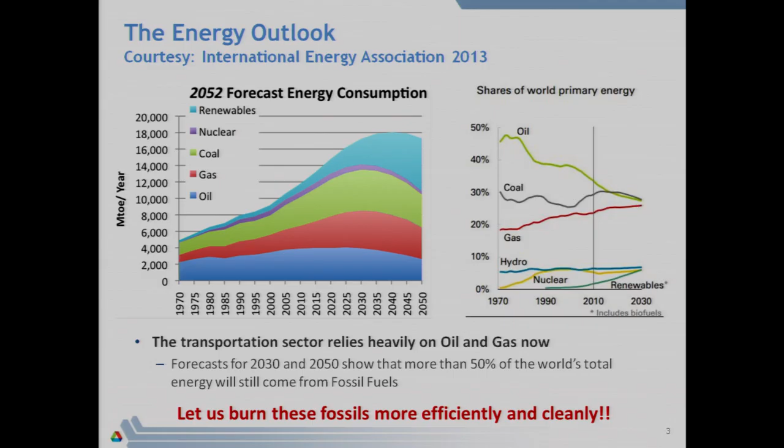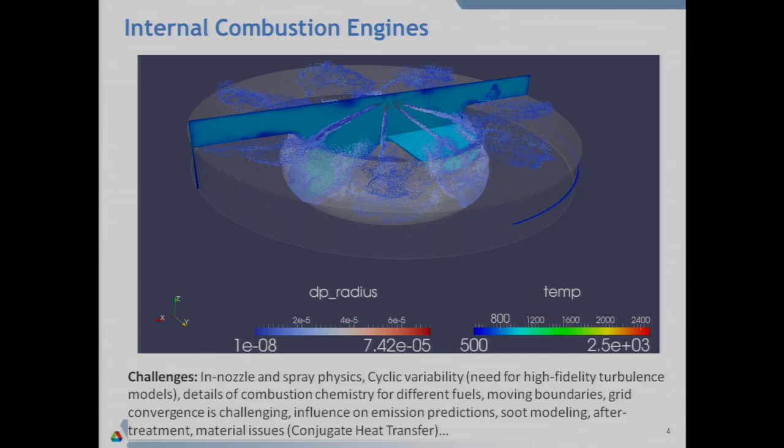What you're looking at here is fuel being injected at the top through a 7-hole injector. As the fuel comes out, it breaks up into smaller droplets, then evaporates. Then ignition happens, combustion happens, and that results in the power stroke that drives your vehicle.

This process is actually very challenging. It looks simple in an animation, but it's challenging because the nozzle diameter is 100 microns—really small, about the diameter of your hair. The engine runs at 1500 to 1600 RPM, revolutions per minute. So you can appreciate the length scale and time scale we need to resolve to do this problem correctly. Those are some of the challenges I've listed here.

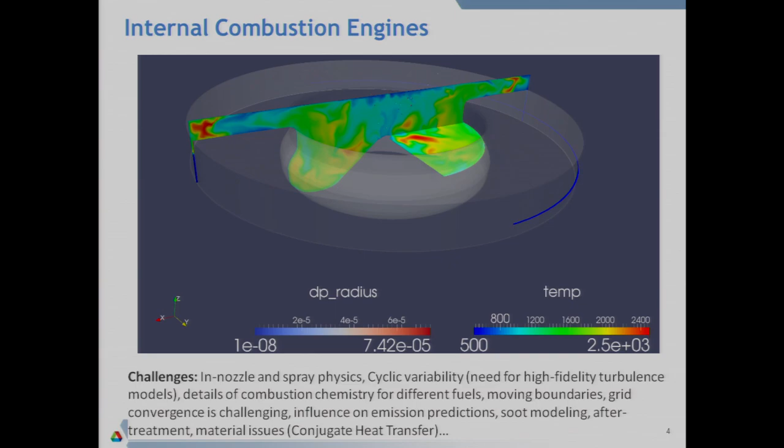The problem with this case is that there is also two-phase flow physics. Anything complicated you can imagine, an engine will have it. This has two-phase flows; we need to resolve the flow inside the nozzle where cavitation occurs. No two cycles of an engine are the same.

You can kind of feel it when you're driving—if you're on the highway with cruise control set to 65, I can assure you no two cycles of your engine are the same. So how do we account for that in our simulations? Like I said earlier, combustion chemistry and fuels are changing too.

The fuels that we burn in North America are very different from the fuel we burn in Asia. The fuel we burn in Illinois is different from the fuel we burn in Texas. So how do we account for those in our simulations?

Of course, we have moving boundaries. Spatial convergence, grid convergence is a big challenge. And then getting the emissions right and soot modeling right is very difficult because you have to get all the processes upstream correct to actually predict the NOx and soot.

And then the new things we are getting into is conjugate heat transfer. For example, for the longest time we were doing simulations of diesel engine, spark ignition engine, and we understood what temperatures to expect, what the peak temperatures are, and we would design our materials based on this. But now we are moving into this area where we are doing low temperature combustion.

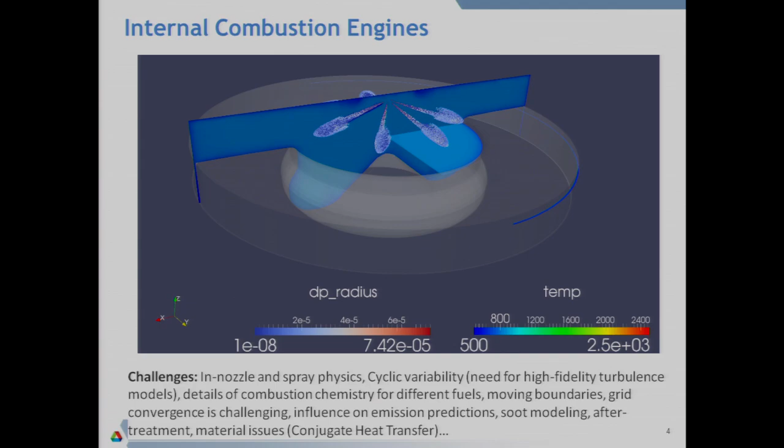So we are trying to intentionally keep the combustion temperatures low. Obviously the material requirements are not going to be that stringent. So how do we couple our understanding of the combustion and the fuels and what's happening near the boundaries to designing the materials? These are all the challenging issues we are facing.

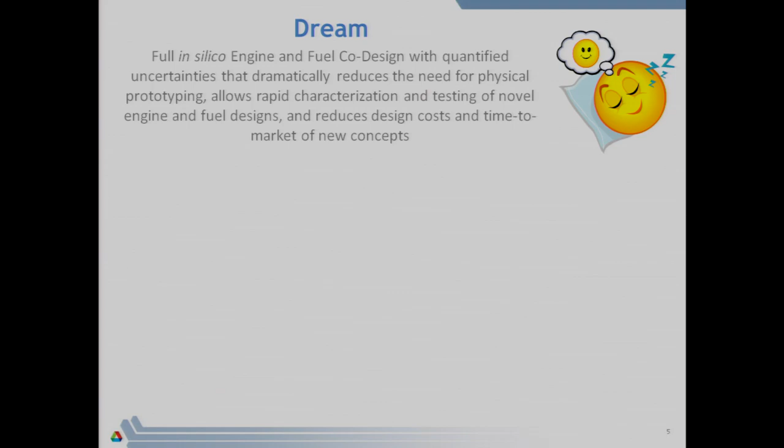The dream, of course, is to design an engine based on simulations, and that's a dream. I don't think anyone has realized it, but the true challenge is if you can actually design an engine faster than experiments. All experimentalists would tell you they can design their engine pretty efficiently because they have been doing that for the last 50 years.

Simulations only form a part of it. They only provide some insights, but engines have not been designed based on simulations. So that basically brings us to the reality. The reality is that engine simulations are quite simple, and I have a couple of slides talking about why they are simple, why the industry wants simple calculations.

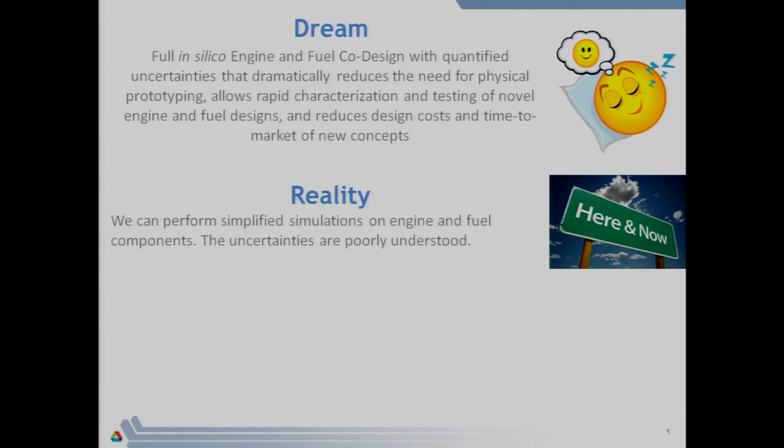The main reason is because our uncertainties are poorly understood. So we basically need some sort of a transformation function, which is the goal of my team: to develop predictive computational capabilities, aided by high-performance computing.

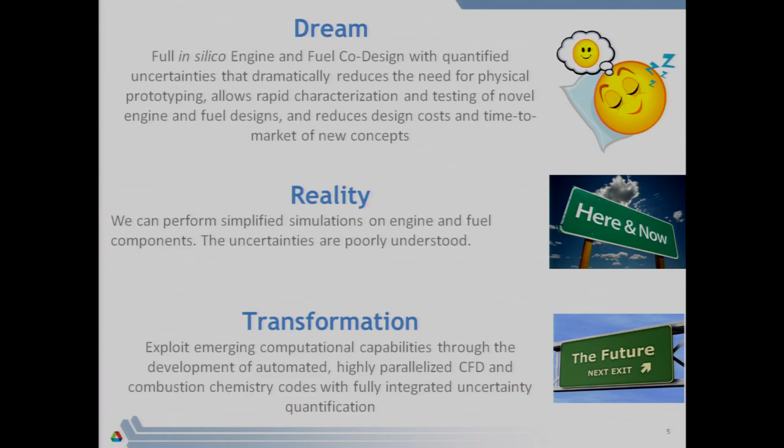For example, in industry, when they do simulations, they do sector simulations. They do not do the full 360, and of course they miss some physics. So if you want to do the full 360, that's a factor of 10 that's required.

Like I said earlier, no two cycles of an engine are the same. So if we simulate just a single cycle, of course we are missing physics. That's at least a factor of 10.

More complicated models - industry tends to use what we call RANS, average, time-averaged models, and of course they do not work very well. So if you want to use some sort of LES model, that's a factor of 10.

If you want to resolve the two-phase flow physics, that's easily a factor of 10. And then if you want to really understand the chemistry - in general, when we represent a fuel, we tend to represent it using one or two components. That's very simplified. A real fuel consists of maybe 1,000 components. So if you want to add that complexity, that's easily a factor of 50.

And we wrap uncertainty quantification on top of it, this becomes a really expensive problem. So the industry wants to solve this problem within 24 hours. They want to press the button tonight. When they come back tomorrow, on 64 processors, they want some sort of a solution - whether it's right or not, that's the solution they want.

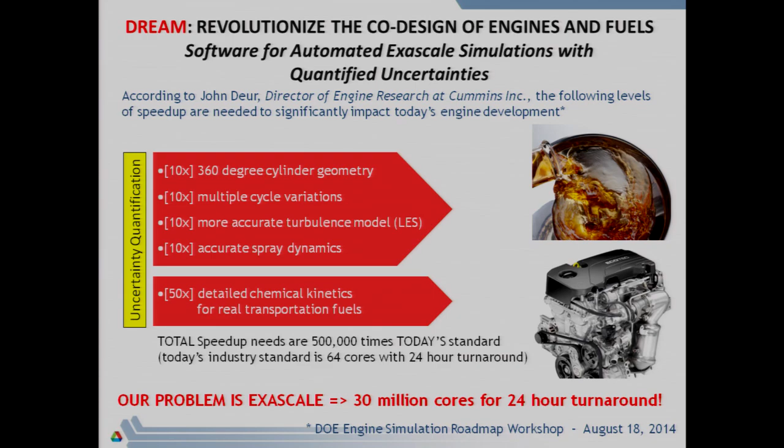So for us, what we are trying to do is if we multiply these speedups, and all these are multiplicative, this actually is an exascale problem. It's easily an exascale problem without any stretch of imagination.

So I think we are pioneering some of this work in trying to scale our engine simulations on supercomputers like Mira, and I'll show you some of our results.

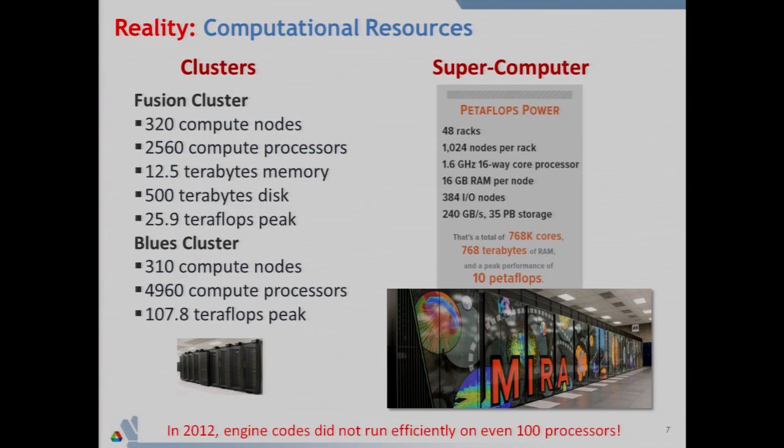The reality is none of the existing resources are exascale. The harsher reality is our engine codes don't even scale on 100 processors, so I have no reason to complain. This is what we are trying to do.

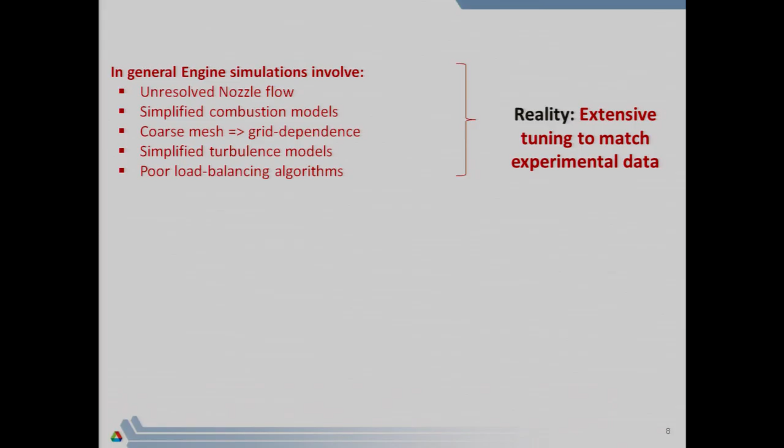In general, engine simulations in industry, academia, and maybe 4 or 5 years back in national labs, were highly tuned. We wouldn't resolve the flow inside the nozzle, and we'd use simplified models for spray and combustion. Load balancing wasn't an issue because we were running on 8 or maybe 64 processors.

The strength of this approach was that when we matched experimental data after tuning, the CFD could provide a lot of insights, and in the domain where it was validated, CFD was very helpful. Industry does that all the time—they get experimental data, validate their CFD model, and go from there.

Now our approach, which we call a transformational approach, is this: we are going to use detailed chemistry-based combustion models, and finer and finer meshes, pushing towards grid convergence.

When I started my postdoc at Argonne, I was surprised to find there was no grid-convergent engine simulation done before my time. That was quite shocking for me. We've been able to do a few, and I'll show you some. Then we'll talk about implementing better turbulence models, like the dynamic structure LES model.

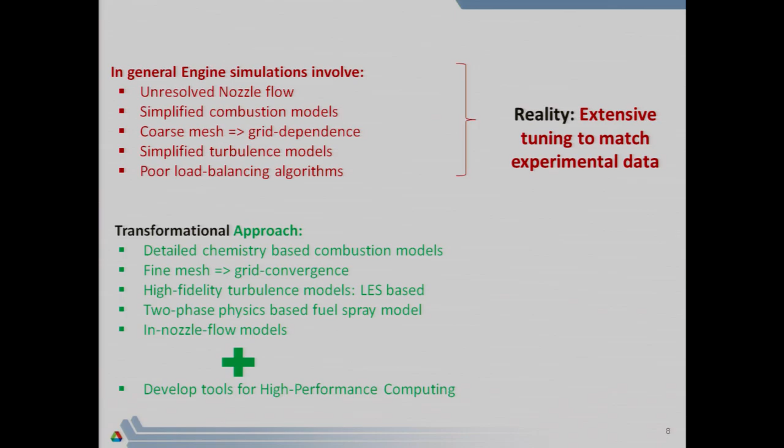We need a better two-phase flow model—this is basically my background, doing two-phase flow simulation. I'll focus a bit more on these areas, looking at cavitation and things like that, and of course working with LES to make these simulations highly parallel, so we can move towards predictive engine simulations. Keep in mind, we are not there yet, and that's job security for me for the next 20, 30 years—maybe job security for Janardhan too.

All right, so let's get to the meat of the talk. We actually use a commercial code called Converge. It's used a lot by industry, so we tend to use it.

All our collaborative partners—Cummins, Caterpillar, GM, Chrysler, Ford—actually want us to use this code, because whatever model developments we do in it, they can get directly. If we develop something in OpenFOAM or Kiva, it's an additional step for them to implement in their workflow.

The reason it works for us is because we have almost full source code access—about 80 to 85% of the code. The 10 to 15% we don't see is basically their meshing algorithms, which are their family jewels; they don't want to share that with us, and we're okay with that. Even with the 80 to 85% we have, we're able to do a lot of things, and I'll talk about it.

We have actually done some of the largest engine simulations known. Some of the numbers are shown here—I won't go into detail, but the key thing is we've now shown good scalability on 4,000 processors. If you remember my earlier slide, in 2012 we were at 100 processors, so you can see the improvement we've made.

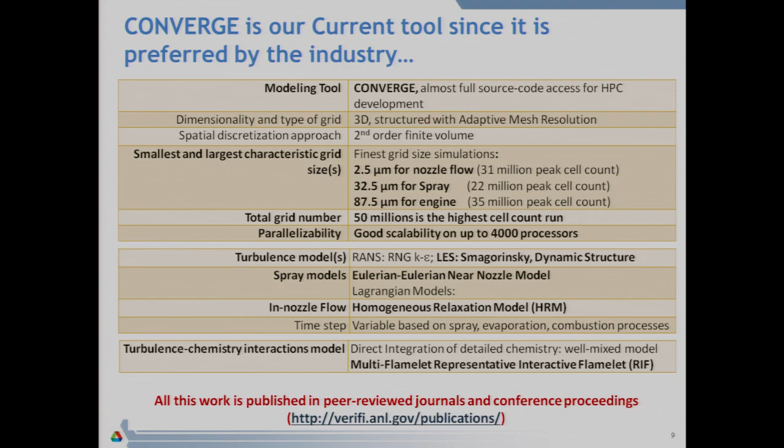As for governing equations, I don't want to make anyone fall asleep, so I've really simplified them—just mass, momentum, energy. This is a two-phase flow, so we basically have source terms for exchanging momentum and energy from the liquid phase to the gas phase. The liquid phase is injected at say 600 meters per second.

That's basically having your gas phase. The liquid phase is solved in a Lagrangian fashion, and the gas phase is basically solved in an Eulerian fashion. And these are some of the coupling terms that we need to account for.

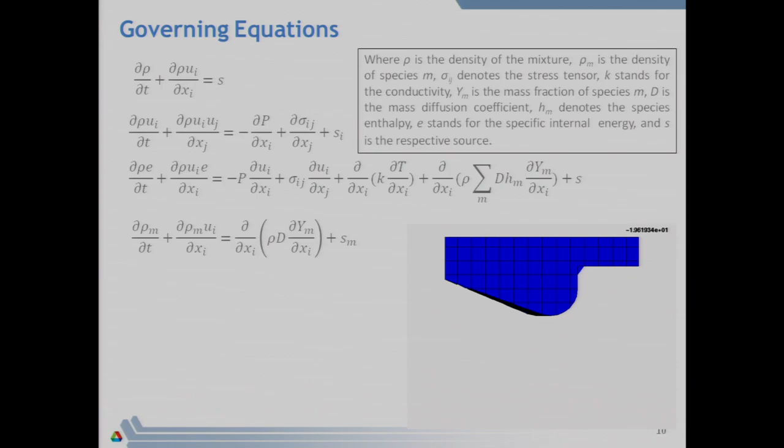We have combustion, so we have species equations, and of course, based on what kind of closure you want for turbulence, we could use RANS or LES or whatever it is. We don't do DNS, that's really out of our box.

One thing I want to mention here is that adaptive meshing is a boon for engine simulations, because wherever we want to resolve the flow fields, we can actually put some mesh there. And you can see that this is a sector mesh that we are looking at.

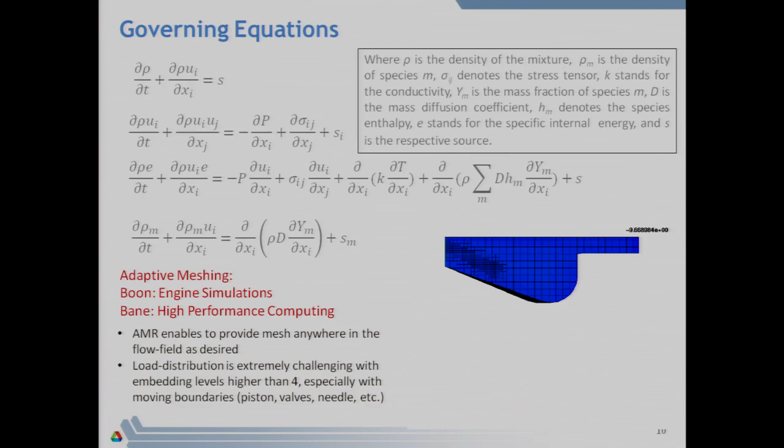But really for our applications, what we have seen is for algorithms like Metis, we struggle with the load balancing. So this is an area that we are actively seeking some help, where we can actually improve the load balancing while using AMR.

A couple of slides that I wanted to show in terms of results. So I have grouped my results in terms of capacity computing and capability computing. You guys have been in this workshop for the last week, so you understand exactly what I'm talking about.

So when I say capability computing, I mean about 5,000 processors. In my field, that's really capability computing. And this work we have been doing in collaboration with Convergent Science and Caterpillar. We have run cases with about 50 million CFD cells.

The other area of interest is, of course, to run capacity computing, and we have an ALCC award from ASCR in order to do some of these calculations, where we are running, say, thousands of cases, still using maybe 5,000 or more processors. And the industry is really interested in these kind of problems where they can use optimization.

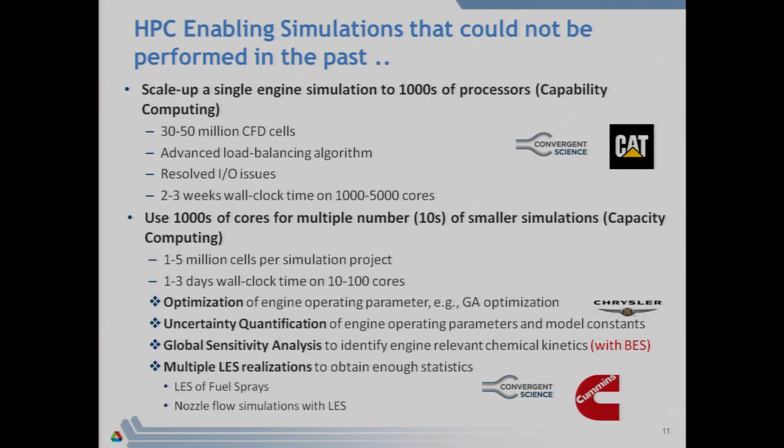So for example, we have done some work with Fiat Chrysler, doing uncertainty quantification, sensitivity analysis, and LES realizations with Cummins. So I'll show you a couple of slides on these projects, basically to highlight the science aspects.

So before I start on the science aspects, a couple of things about what we have done in terms of scaling. So this is some work from 2012 where we are trying to run an engine simulation on 256 processors. I know that's peanuts for you guys, but that's what we were trying in 2012.

And these are some of the results. So the blue dots are results without METIS. I'm plotting the cell count as number of cores, and this is at top dead center. So what we observe is without METIS, there were a lot of cores with 0 cells and a lot of cores with more than 8,000 cells. The cores that had more than 8,000 cells absolutely ran out of memory, so our simulations would crash.

At top dead center, working with ALCF and MCS, we implemented METIS, and this is the load balance - these are the red symbols that you can see. So you can still see that there is load imbalance, but at least there are no cores with 0 cells, and at least there are no cores with more than 6,000 cells. So we were able to proceed the calculation beyond top dead center, and these are some of the results.

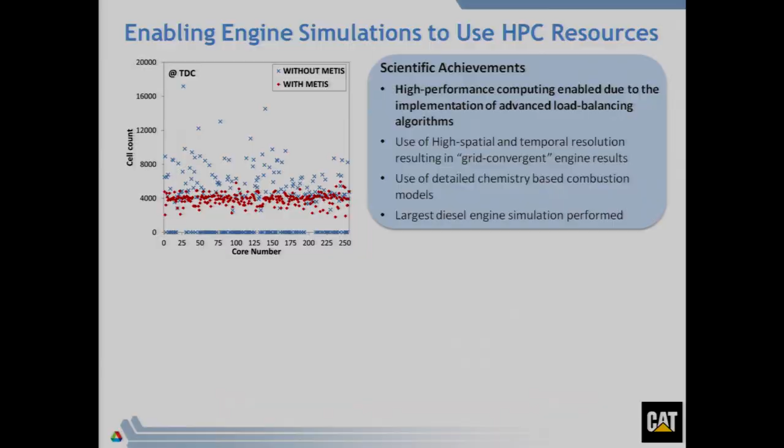So without METIS, we were actually not able to do this calculation with about 34 million cells, and METIS allowed us to do this. And by doing this, we were able to actually run the first grid convergent engine simulations.

And these are some of the results that we get. This is basically explaining why we observe grid convergence. It's because we are starting to resolve some of the relevant turbulence scales. I'll skip the details there. I'll talk more about the results here.

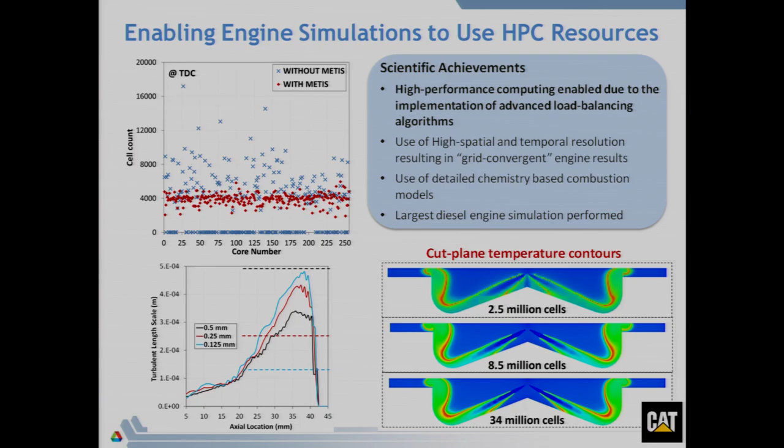So here I'm plotting cylinder pressure as a function of crank angle. Here I'm plotting the engine out NOx emission as a function of crank angle. And all these are plotted for different minimum mesh sizes. So I'm going from 2 millimeter minimum cell size all the way down to 100 micron minimum cell size.

So if you look at a parameter like cylinder pressure, which is a global parameter, it's a cylinder average parameter. From our simulation, we observe that cylinder pressure basically grid converges at say 0.5 millimeter. So even putting more resolution really doesn't help you get better results or different results for cylinder pressure.

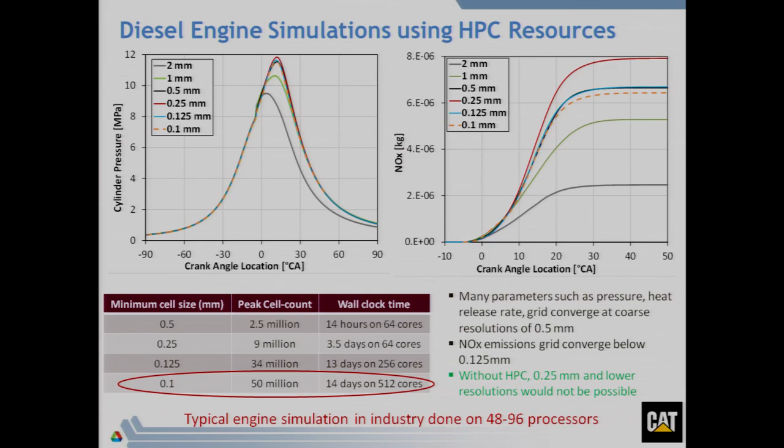However, if you look at a parameter like NOx, we see that it's highly non-monotonic. NOx first increases, then decreases. Unless we did a calculation with about 100 micron resolution, it was very difficult for us to understand where NOx grid converges. In order to do this 100 micron calculation, we had to take about 14 days on 512 processors with about 50 million cells. And again, this wouldn't have been possible without METIS and without the HPC resources at Argonne.

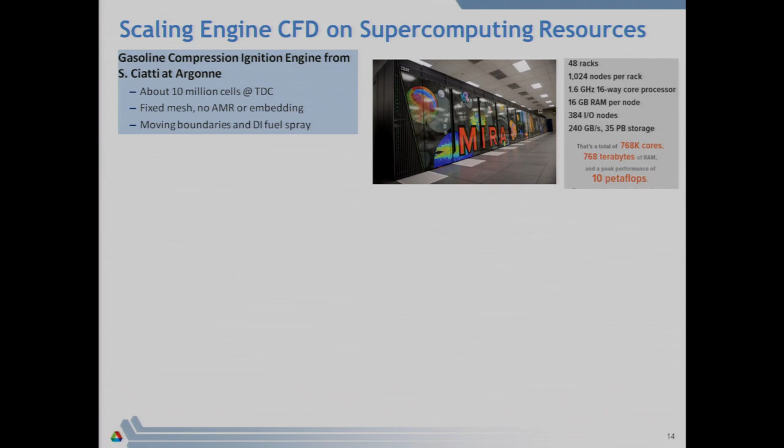So continuing that work, we ported the code onto Mira, and we started exploring this combustion concept called gasoline compression ignition. It's a little bit tricky to understand. Typically spark engines or gasoline engines are spark ignited, and diesel engines are compression ignited. So here we are compression igniting gasoline fuel. It's a mixture of two concepts, and what we are trying to do is marry the best of both worlds. It could be a disaster if it doesn't work, but the idea was to get the best of both worlds.

Janardhan actually performed a lot of optimizations working with our experimentalist, Dr. Steve Ciatti at Argonne, who is one of the pioneers of this low temperature combustion concept. We were able to get some really nice results using Mira, and in order to get these results, we had to do a lot of code optimization.

We worked with ALCF. These are some of the things that we did. I'm not going to get into the details, but I do want to highlight one new thing that I think is quite new in the literature. I haven't seen this before.

So for example, if you look at this cut plane, and here I'm plotting temperature, if I look at processor P1 and P2, and if I just use METIS to load balance, it's quite possible that P1 and P2 have the same number of cells. However, the computational load on P1 and P2 is very different because the combustion chemistry is very different. The equivalence ratio is very different.

So what we started doing, in collaboration with Convergent Science, was actually load balancing the actual load. We came up with a stiffness-based criteria, and we started load balancing the actual load. And this actually helped us quite a bit.

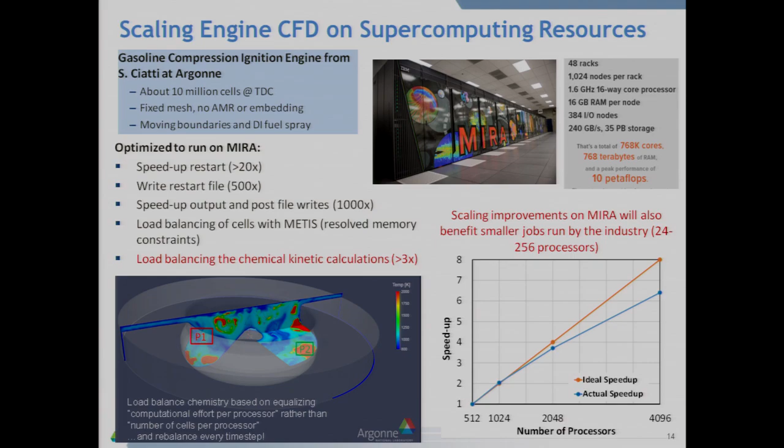Couple of slides on the science aspects. My background is nozzle flow simulations, spray simulations, two-phase flow modeling. So we work like ALCF is a resource. APS is also a resource at Argonne National Lab. APS stands for Advanced Photon Source.

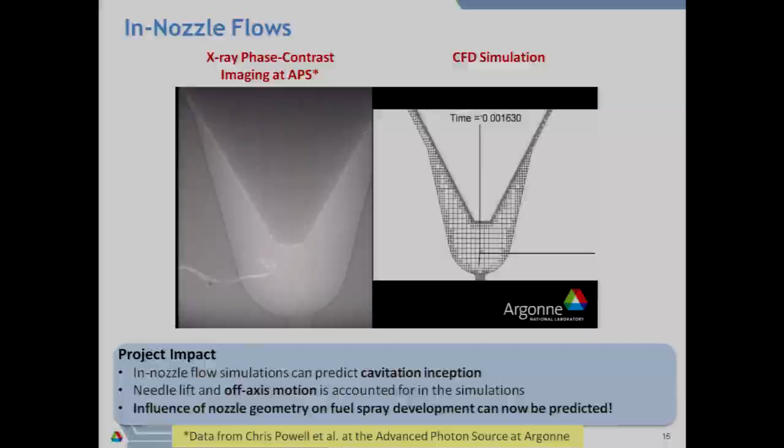So in our simulations, we are actually able to mimic this, and this is our simulation result. And for a single hole injector, this off-axis motion was really not important. So then we showed this to GM, we showed this to Cummins, and they got very excited because their injectors are multi-hole. A Cummins production injector is 9 holes.

So based on some of the work that we did, this became basically part of the workflow in Cummins. And some of this work is going to feed into the 2025 engine design. Their 2019 engine design is sealed, okay? So it's going to hopefully impact some of their 2025 engine design.

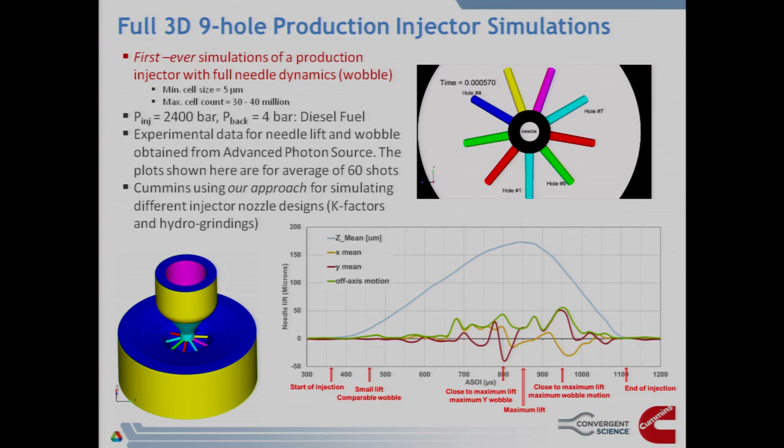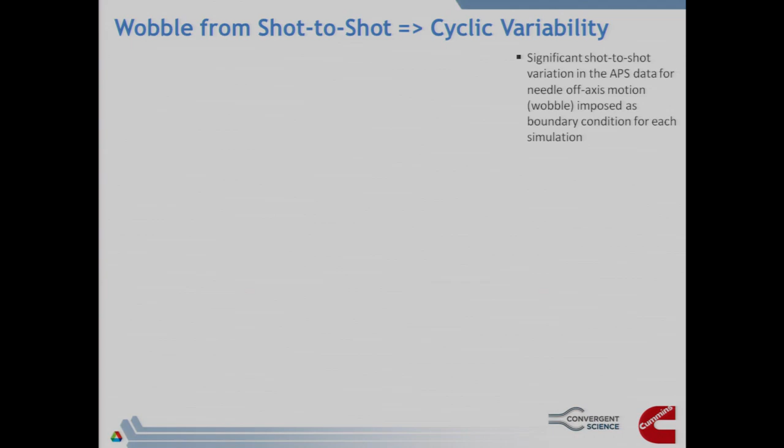The other aspect I spoke about earlier was shot-to-shot variation. No two shots, no two cycles of an engine are the same, and we tried to capture some of this from our simulations. So again, we got some needle measurements done at Advanced Photon Source.

What we found out was there was significant shot-to-shot variation from one injection to another. That's because this is a cantilever, which has a natural frequency of oscillation. In an ideal world that should be repeatable, but because the pressure is changing from cycle to cycle in the sac and the orifice, we find that this off-axis motion is changing. So we imposed that in our calculation.

Currently, each of these calculations take about a month on 256 processors, and you can imagine we have to run maybe 20, 30 shots. So you can clearly see this is very expensive. In our new ALCC award, we are trying to see if we can optimize this further running on Mira.

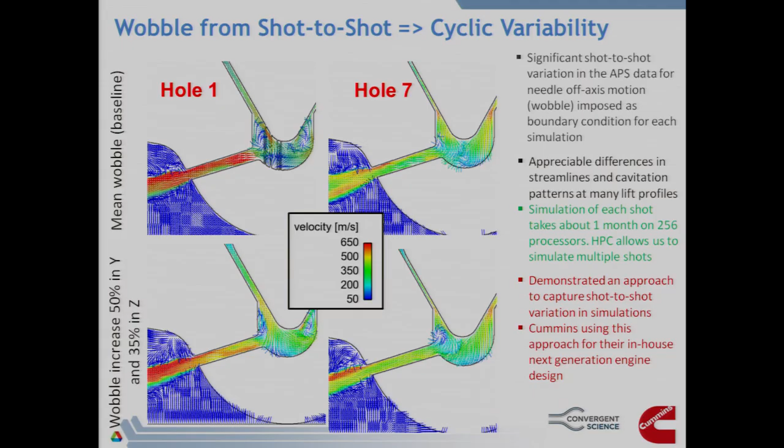The other advantage of having HPC resources is you don't have to take any shortcuts. For example, when industry does these injector or nozzle flow simulations, they typically try to do simulation on a single orifice, say orifice number 1, 2, 3, whatever it is. That's because they have computational constraints; they do not have the computational resources.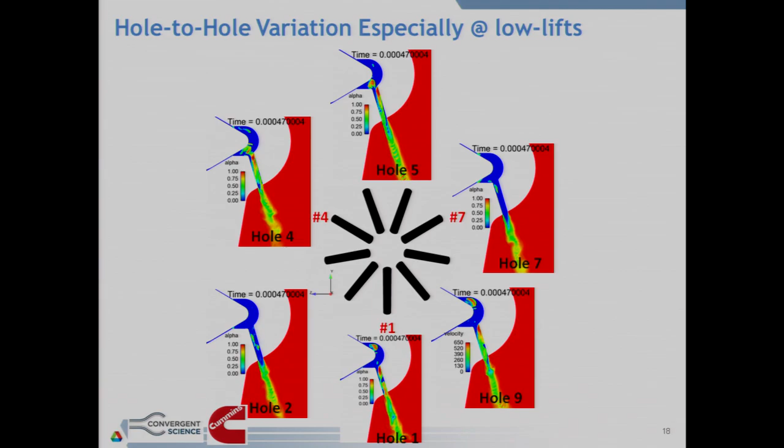Now when we do this 9-hole injector simulation, you can clearly see that sector simulations are essentially useless. Each of these orifices actually have different two-phase flow characteristics. The cavitation is different, the spray that's coming out is very different. And this is only possible because of the HPC resources that we have.

The other challenging question Cummins posed to us was fuel dribble. Fuel dribble is a very applied issue. What happens is during the fuel injection process, at the end of the main injection, fuel is injected at say 600 meters per second, and it basically breaks up, ignites, and combusts. But toward the end of injection, the fuel that comes out has very low velocity, so it doesn't break up and doesn't burn properly, resulting in hydrocarbon emissions.

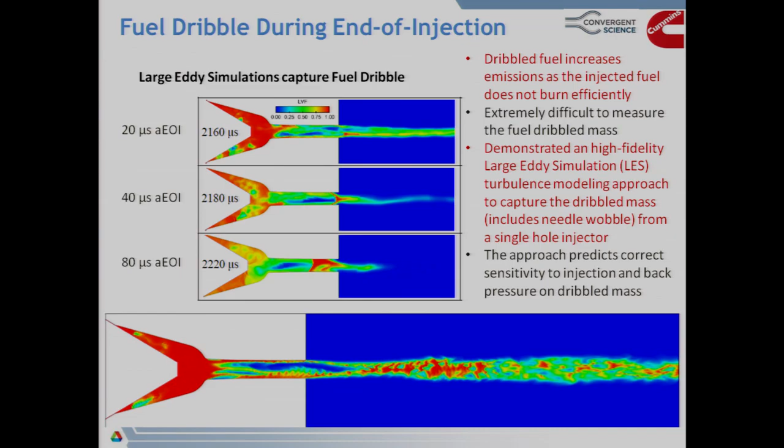So this is something we told Cummins, and now we're trying to apply this approach to their 9-hole injector. It's a very expensive calculation, but you cannot do this with experiments - you cannot measure the amount of fuel dribbled out experimentally. This is a real issue because unburned hydrocarbon increases with large sac volumes, so without simulations it would be very difficult to solve this practical problem.

So this is basically our workflow now: we can go from nozzle flow simulations - this is actually a GM 1.9 liter diesel engine simulation - and we can resolve the flow inside the sac and the orifice.

We can understand plume to plume variation, and we can now understand how that affects combustion. You can clearly see each of the spray plumes and each of the combustion regimes are a little bit different from plume to plume.

These simulations were not possible 3 years back. They are possible now because of some of the HPC and science developments that we have done.

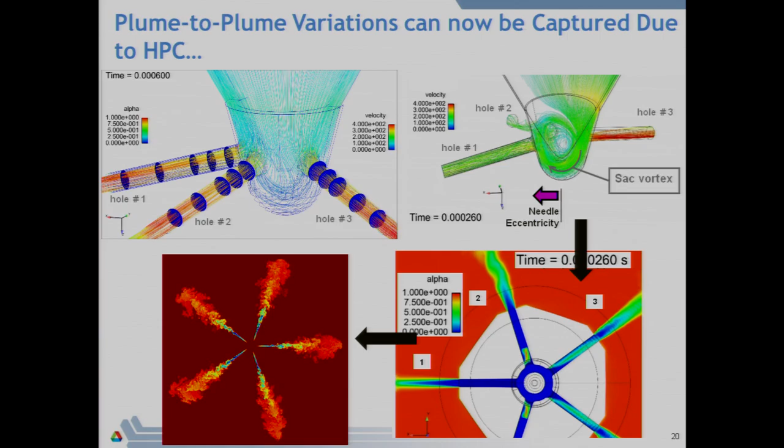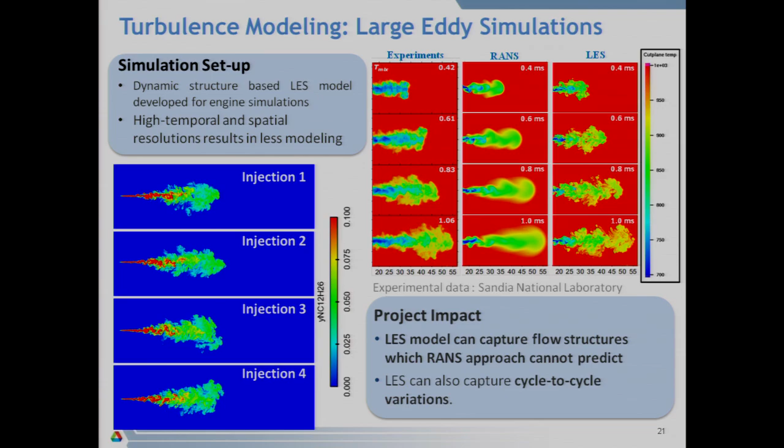I think in a lot of fields there is this question of RANS versus LES. RANS is some sort of a time average scheme, simplified turbulence model. At least in industry, there's a lot of question as to whether there is any merit in using large eddy simulations, LES. So we have been working for the last 5 years on trying to implement better and better LES models.

Of course, they come at a cost. This slide has been used by all our industrial partners because the common question is, what's the benefit of using LES? LES is about 100 times more expensive than RANS, so there has to be a real benefit of using it.

So here we have done some work. We've taken experimental data from Sandia National Lab, looking at vapor penetration as a function of time - the fuel vapor coming out of the fuel injector. What we observe is, if we have a simplified turbulence model, as we refine the mesh size we do get grid convergence, but it converges to the wrong answer - it doesn't match the experimental data. With LES, we see that it not only grid converges to the right answer, but it also matches the experimental data, because of the higher fidelity turbulence model.

With LES, we are actually able to resolve some of the large scale flow structures, and hence we are able to get the mixing better predicted, and get this vapor penetration better captured. So in industry, they basically use this slide to tell their managers that they need more computing power.

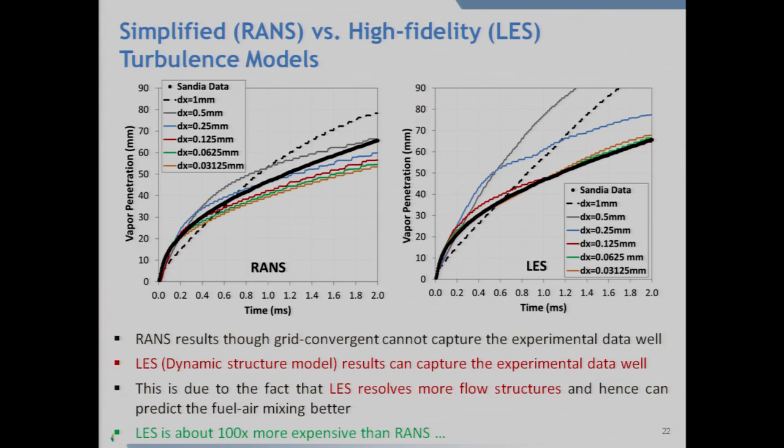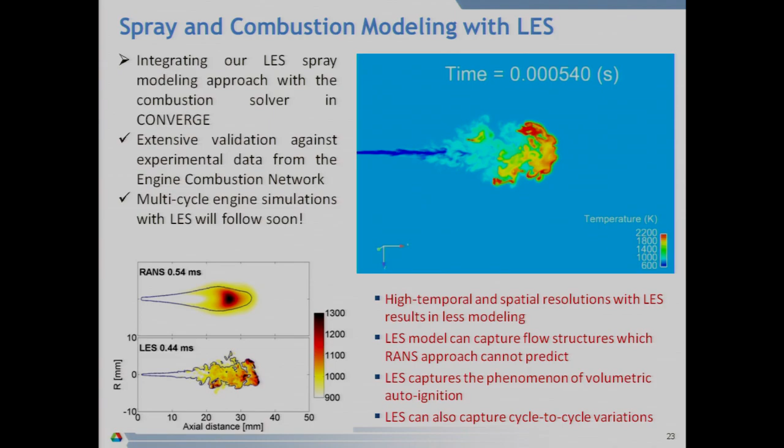Now we have started doing a lot of these combustion calculations - again, a reason to say why we need LES. LES is 100 times more expensive, like I said earlier. But if you look at RANS, a simplified turbulence model, we see one spot of ignition, and that one spot tends to grow. With LES, we actually see multiple spots of ignition, which is what basically happens in a real engine. So we get better physics with LES, and that comes with 100 times more cost.

I have several slides, several things to discuss here, but the main key point is that with RANS, when we do 2 different cycles, they give the exact same answer. With LES, when we do 2 different cycles, we get a marginally different answer.

Then the question is, how many realizations of LES are necessary to, for example, mimic experimental data? So we have started looking at criteria like relevance index, and the idea is to understand how many realizations are necessary to mimic an actual calculation, an actual average of 16 realizations.

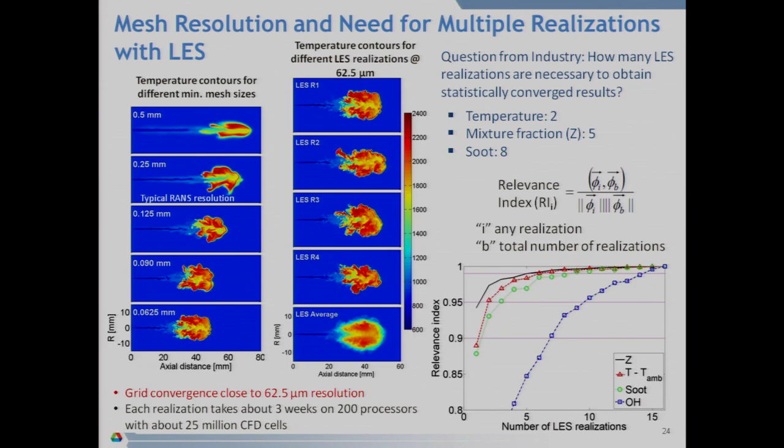We find that if you want temperature correctly predicted by LES, we need 2 realizations. For mixture fraction, we need 5. To get soot correct, we need 8. This tells us that beyond 8 realizations, you really don't have much to gain from running a 9th LES realization, but you really do not know this unless you run all 16 realizations and perform that average.

The last part of my talk is uncertainty analysis. We have recently started looking into this. In the past, there hasn't been any reason to look into this because the simulations really were not that predictive - they were always being tuned.

Still, the way to understand this - and I think most of you are familiar with uncertainty analysis, uncertainty quantification - is that if you have a simulation, you have multiple sources of uncertainties: model constants, boundary conditions, experimental data, fuel properties, chemistry - everything is a source of uncertainty. In fact, nothing is certain, actually. So what we try to do here is quantify these uncertainties. We talk to our experimentalists, our fuels people, our chemistry people, and try to understand what these uncertainties are and how they influence these calculations.

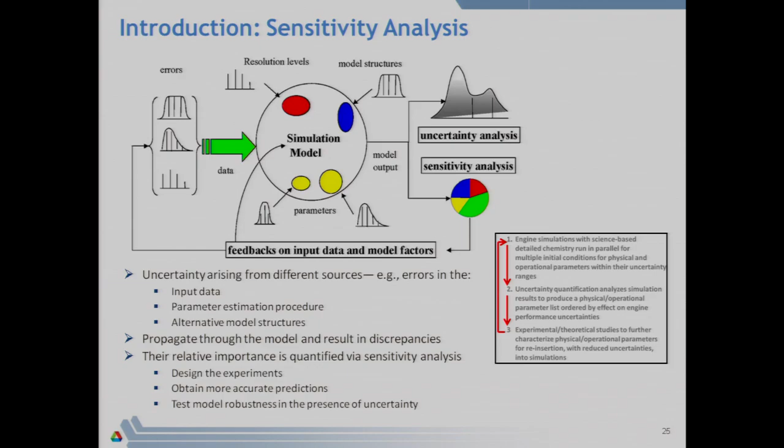We try to simulate and perform this sort of workflow that I'll discuss again later. So this slide is where we try to understand the chemistry uncertainty.

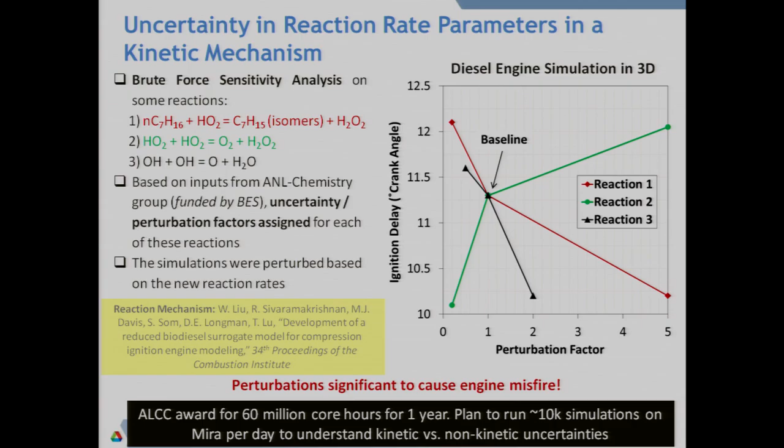That's really not acceptable. This is one way when we use global sensitivity analysis, we can actually improve the predictions. We have an ALCC award with 60 million core hours where we try to quantify uncertainties better and understand how they influence our target. In this ALCC award, we plan to run on the order of 10,000 simulations per day and understand the uncertainties from kinetic to non-kinetic parameters and how they influence our final target.

This is a sample result where we applied uncertainty analysis on everything apart from the chemistry. The uncertainties are, for example, model parameters, experimental parameters, etc. This is a Caterpillar single cylinder engine, and for these baseline conditions we match the experimental data very well, then we identify the uncertainty. For example, if you look at piston wall temperature, the baseline is 553, the minimum is 538, and the maximum is 568. Using a Monte Carlo fashion, we perturb all our parameters based on this uncertainty range, and for 32 parameters, using sparse techniques, we run about 100 simulations per speed-load condition. This is some of the result that we can get.

For example, if you're interested in a parameter like engine-out NOx, this global sensitivity analysis tells us that parameters like Schmidt number and Prandtl number, which are modeling parameters, affect the NOx results the most. So if we cannot match experimental data for NOx, this basically tells us the reason why we cannot match it.

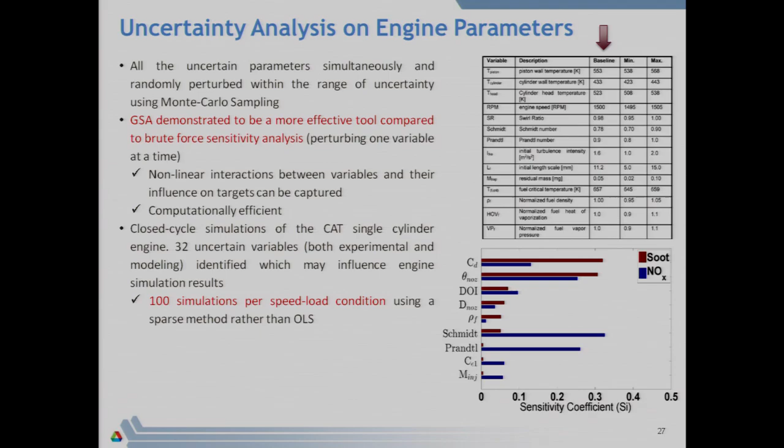Similarly, if you're interested in soot, what we find is the discharge coefficient of the nozzle and the angle of the nozzle are very important. The angle of the nozzle decides your spray plume, at what angle it's coming in and where it's hitting, which becomes very important when trying to predict soot. So we've been able to apply GSA to understand some of this.

These calculations by themselves are not very expensive, but when we launch them in an ensemble fashion, it really becomes capacity computing and starts to become very expensive. This is some work that we did with Chrysler. This project just finished, and this is what they call a dual fuel combustion concept.

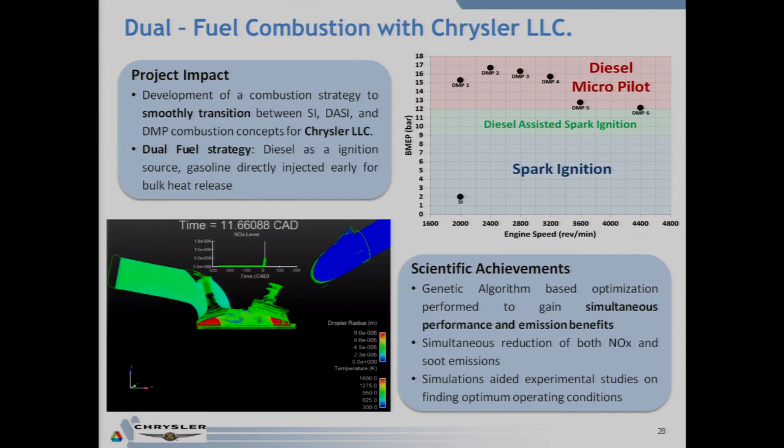Okay, so my task was actually to develop a CFD tool, and we were able to do this, but more importantly, we actually needed HPC to do some sort of optimization. Since it's a new combustion concept, they were afraid of trying it in an actual test cell. But in a simulation, you can do whatever you want, right?

So we did some optimization, and we came up with certain conditions like EGR, ICL, DMP ratio, start of injection timing, which we thought was really optimum in terms of avoiding the NOx and soot island. For example, in a spark ignition engine, NOx is an issue. In a compression ignition engine, soot is an issue. So if we are able to marry these two concepts, hopefully we were able to avoid some of these NOx soot islands, and based on our CFD results, our optimized results are able to avoid both the NOx and the soot islands.

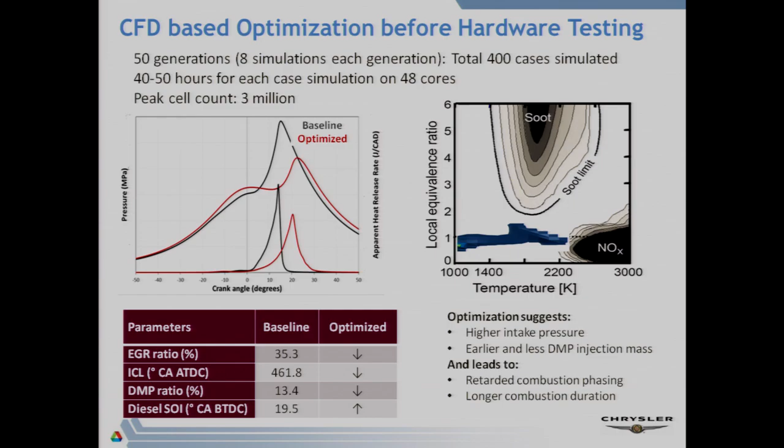And again, in order to do some optimization like this, we had to do a lot of cases, and these were all run in an ensemble fashion. So HPC, we believe it's an enabler for simulation-based engine design.

Of course, we are not there yet. It's going to take us maybe a lot more time. But with the resolution that we have and the science that we understand, we are able to do high spatial and temporal resolutions. We are starting to incorporate more and more robust turbulence models into our calculations. We have moved away from simplified chemistry, so we are able to incorporate more detailed combustion models, chemistry models. And in doing all this, we are able to solve one-of-a-kind problems.

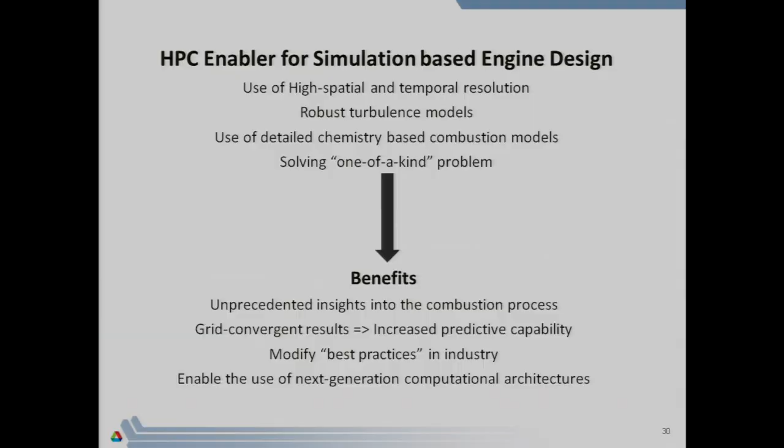And for the industry, we are able to provide unprecedented insights. We are able to get some grid convergent results. With Cummins and Caterpillar, we have been able to modify some of the best practices in the industry, the way they operate their simulation workflow. Some of this work hopefully will enable us, because we are doing large calculations, to move our calculations into the next architectures like Theta and Aurora.

So by doing all this, we have actually launched this program at Argonne. It's called VERIFI. It stands for Virtual Engine Research Institute and Fuels Initiative. It's basically a sort of a consulting service where the industry would come to us with a problem of their interest, and we'll try to provide them with a solution based on the expertise that I just described.

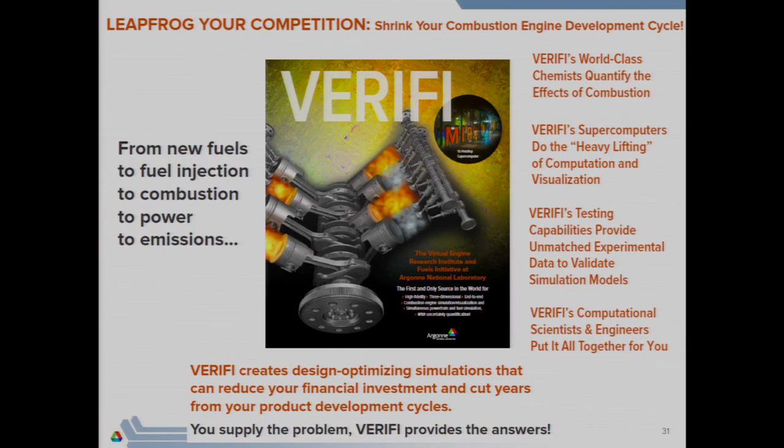So we have a lot of chemistry expertise. Of course, we have a lot of computing expertise. We have a lot of experimental data. And then we have people like me who know the domain very well, the science very well, who try to pull all this together. So the idea is to try and attract the industry to come and work closer with Argonne.

I'm happy to take any questions.

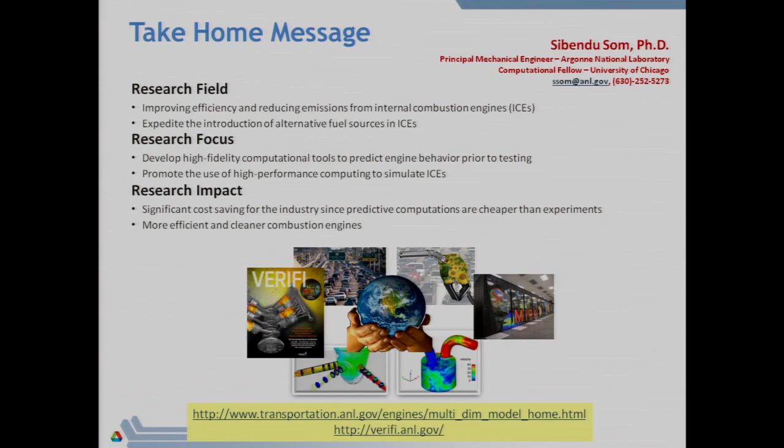So you mentioned that you used commercial software, Converge. What kind of challenges did you have scaling that? Did you have to tweak something, and how accessible was that to you? So yeah, when we first started, we were just adding UDFs, so that wasn't an issue.

But slowly, when we started to do some real calculations, we needed source code access. So around 2012, they started providing us source code access. With 80-85% source code access, we have been able to do a lot. We work very closely with Vitali, Marta, Kevin Harms, and we've been able to do a lot, actually. So not having enough of the source code has not restricted us yet.

But I do envision that once we start getting into AMR, trying to scale with AMR, trying to scale with embedding, that's when we would actually need the full source code access. But we are not at that point yet.

And the key thing is industry is still way behind. Industry is still in the 100 processor, 60 processor range, so the existing algorithms actually work fine. So from a software vendor perspective, there is no real push from the industry to do this. We are doing this because we are a national lab and we want to advance science. But from an industry perspective, the push is low, I would say.